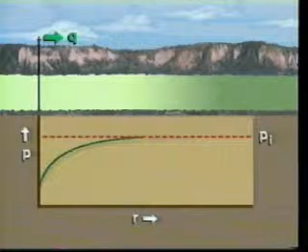Typically, the reservoir data that can be obtained from a pressure transient analysis include reservoir pressure, permeability, skin factor, the damage ratio, the PI or productivity index, radius of investigation and time to stabilization, degree of reservoir depletion, and the presence of faults, barriers, fluid contacts, or pinch-outs.

In this module on oil well testing, we shall begin with a review of the theory upon which pressure transient analysis is based. We shall then apply this approach to data from 3 reservoir systems: first, a reservoir which acts as a homogeneous system; next, a hydraulically fractured well; and finally, a dual porosity system.

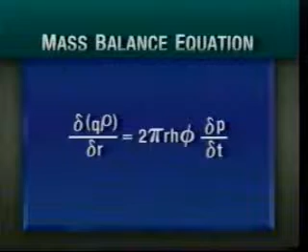Let's begin. The basic model for describing reservoir pressure response to flow is developed by combining 3 fundamental equations: a mass balance or continuity equation, which states that the rate of accumulation of mass in an incremental element is equal to the rate of mass flux into the element minus the rate of mass flux out of the element; a transport equation, in this case Darcy's law, which describes the relationship between volumetric flow rate and the pressure gradient; and an equation of state, which relates fluid density to pressure and temperature.

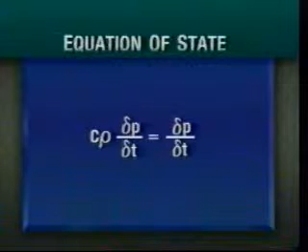By combining these equations and making some assumptions regarding the system, we can derive the radial diffusivity equation, a partial differential equation relating the rate of change of pressure with radial distance and time. Solving this equation for certain conditions allows us to develop a method for calculating reservoir parameters from measurement of the response to pressure disturbances in the reservoir.

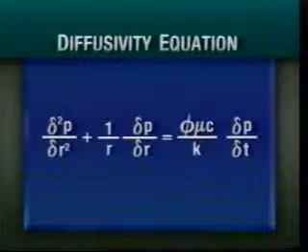In the other programs of the 400 series, we have spoken at greater length about the use of these flow equations in both conventional and modern methods of well test analysis and interpretation of pressure time data. Here we'll just review briefly. If you are unfamiliar with the basic concepts and techniques of each method, be sure to view the other programs before continuing.

Let us begin by making the first of many assumptions concerning our reservoir model. First, the reservoir is horizontal and of constant thickness, and is of infinite radial extent. It is bounded on top and bottom by impermeable boundaries, and is homogeneous and isotropic. Next, the producing wellbore is completely open to flow over the entire reservoir thickness. Next, only a single phase flows in the reservoir. And finally, the reservoir fluid is slightly compressible and at a constant temperature.

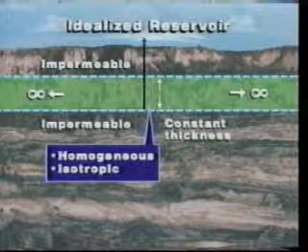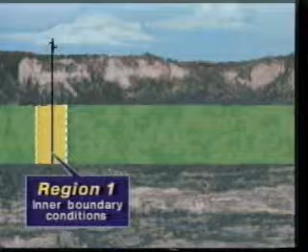Our model must also describe all the conditions existing in the reservoir: the inner boundary conditions at or near the wellbore itself, the conditions away from the wellbore, essentially the reservoir itself, and finally the conditions at the outer reservoir boundaries.

When a well is produced after a period of being shut in, a simple Cartesian plot of pressure versus time reveals a succession of 3 flow periods: a wellbore influence flow period, also known as the transient flow period. During this flow period, the reservoir acts as though it were infinite in extent.

A transitional flow period. Normally, no analysis is made of this period, owing to the complex interactions between the changing reservoir pressure and the reservoir geometry. And finally, a steady state or pseudo-steady state flow period. Due to the difficulty of maintaining a constant flow rate during a drawdown test, emphasis has been given to the development of methods to analyze buildup data.

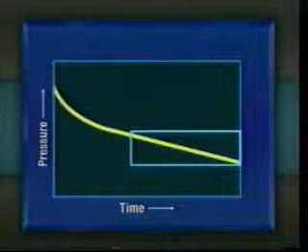The Horner method of pressure buildup analysis is based on the assumption of a constant rate of production prior to the test, beginning from a uniform initial pressure in an infinite reservoir. The graphical form of Horner's method will yield a straight line on a semi-log plot of pressure versus time.

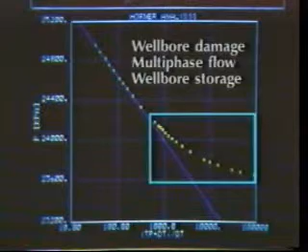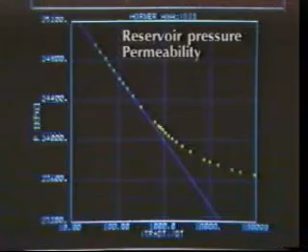In actuality, Horner plots usually show deviations from the expected straight line during the early time portions of the build-up plot, largely due to the effects of wellbore damage, multi-phase flow, and wellbore storage effects. These early time effects are usually overcome in later time. Thus, the straight line can ultimately be extrapolated to determine the average reservoir pressure. Additionally, from the Horner analysis results, we are able to calculate the permeability, flow capacity, and skin factor.

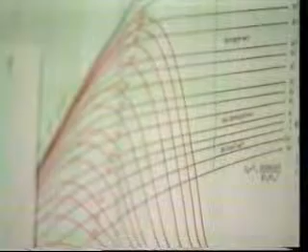The chief limitation to the Horner method is that it is only valid after wellbore storage effects have ended and before the boundary effects have begun. If wellbore storage occurs over the entire duration of the test, or if boundary effects begin immediately after the wellbore storage effects, it will be impossible to obtain the necessary straight line on the semi-log plot, and thus the Horner method will be inapplicable. With the modern methods, the presence of wellbore storage or boundary effects does not pose the same problem to the analyst.

As we've said elsewhere in the 400 series, the modern methods of well testing make use of all the data acquired during the course of a well test, including the data from early time. Modern methods graphically characterize the data by plotting it in the form of delta P, the change in pressure at the sand face, versus delta T, the elapsed test time, in log-log form. Additionally, the pressure derivative, with respect to time, is also computed and plotted on the same log-log plot.

More about this momentarily. Right now, let's look at the significance of the various sections of the curve depicted on the log-log plot. This will prepare the analyst to undertake a qualitative analysis of the test data and to indicate the point in time when a particular flow regime has ended and another begun. For example, here's the beginning of the wellbore storage influence period, as evidenced by a line of unit slope, which can be drawn through the early time data. Following the wellbore storage influence period is the infinite acting period, evidenced on the log-log plot by the straight line portion of the data curve.

The boundary influence period is evidenced by a deviation from the infinite acting period. However, the boundary influence period may be undetectable on the data plot. It may only be evident on the derivative plot. The derivative plot is determined with respect to the superposition time function. Basically, the plot is made by calculating the speed at which pressures are changing during the transient. Generally, the derivative plot is calculated on a computer.

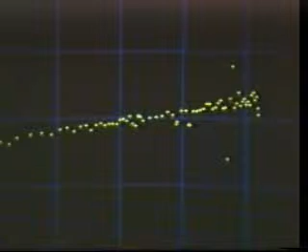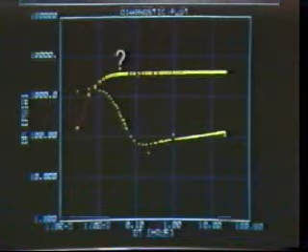There are several methods and choices available for computing and smoothing the derivative values, and it should be noted that any measurement errors made when conducting the test can contribute to creating a noisy derivative. The derivative plot is especially useful when trying to determine the end of the wellbore influence period. Note the characteristic hump in the derivative values, followed by a flattening. The end of wellbore storage is sometimes evident on the data plot as well, but it can be more readily and accurately seen on the derivative plot.

The horizontal portion of the plot, where there is no change in the derivative, is indicative of the infinite acting radial flow period, and hence that section of the pressure transient which would produce a straight line if plotted on semi-log paper. The boundary influence period can be recognized by a late time deviation of the derivative value. As before, the presence of a boundary may not be evident in the data plot at all. In this specific example, the data plot remains virtually unchanged while the derivative plot bends upward.

Ultimately, the specific shape of this section of the derivative curve can be used to determine the type of boundary that is influencing pressure behavior. For example, no-flow barriers or constant pressure boundaries. The derivative plot is also helpful for determining the cause of an anomalous pressure response, although this particular topic is beyond the scope of this video. There are, however, SPE monographs and other technical publications that provide much useful information on the analysis of anomalous pressure situations.

Let's summarize the material covered so far. In the first unit, we mentioned the basis for well test analysis and interpretation. We spoke of three necessary equations: a continuity equation, a transport equation, and an equation of state to derive the diffusivity equation, the basis of pressure transient analysis. We spoke also about the two methods, the conventional and the modern, and the way that each approach treats the pressure and time data. Lastly, we spoke of the derivative curve and its usefulness in providing interpretive information beyond what is available from a typical log-log plot of the data.

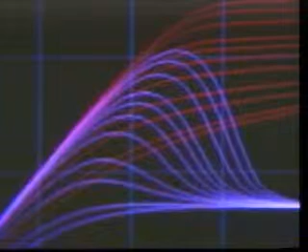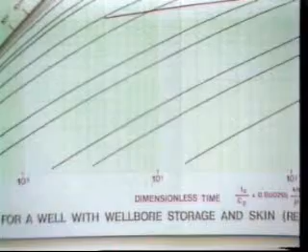A type curve is generally a log-log plot of pressure versus time expressed dimensionlessly, prepared in such a way that the curves are universally applicable for all types of specific reservoir environments. One set of curves is for wells with wellbore storage and skin in a reservoir with homogeneous behavior, another set of curves for a vertically fractured well in the center of a closed system with no wellbore storage, with fractures of infinite conductivity, and so on.

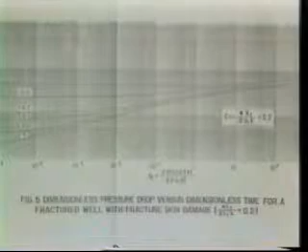The procedure for utilizing the type curves is quite straightforward, especially if we make use of the software currently available for pressure transient analysis. Place the log-log plot, including both the data curve and the derivative curve, on top of the type curve, and move the log-log plot over the type curve until a match is obtained.

We thereby obtain values for P sub D and T sub D, as well as a value for C sub D e to the 2s. These values will then be used to calculate values for permeability and skin for the reservoir.

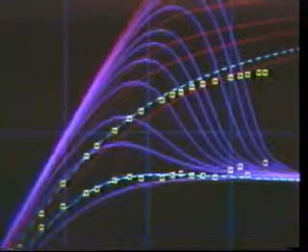When the proper match is obtained, the pressure and derivative data will lie on the corresponding curves at the same time. If the best match lies somewhere between the type curves, not to worry. The computer will generate a unique type curve for both data and derivative curves.

Ultimately, the values obtained from a type curve analysis should show close correspondence with the values obtained from the conventional Horner analysis. With this information on both the Horner and the type curve methods of pressure transient analysis in hand, let's now look at a build-up test, specifically the final shut-in period of a drill stem test conducted on a well in the North Sea.

This test was run in order to determine current reservoir pressure and to calculate reservoir parameters previously estimated from well logs. The following information was available prior to the test.

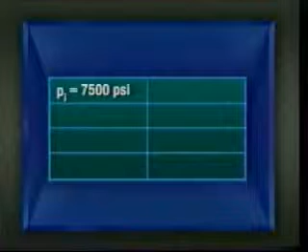The estimated initial pressure obtained from the initial shut-in period is 7,500 psi. The formation thickness is 18 feet. Fluid compressibility is 15.4 times 10 to the minus 6. The formation volume factor is 1.22. Viscosity is 0.53 centipoise. Porosity 15%. Wellbore radius 0.4 feet. The well was produced at a rate of 674 barrels per day.

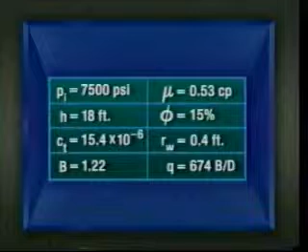We first construct a simple Cartesian plot to check for the presence of any anomalous tool response. The tool seems to have worked properly. We next construct the log-log data plot. We note the presence of wellbore storage as indicated by the unit slope of the early time data.

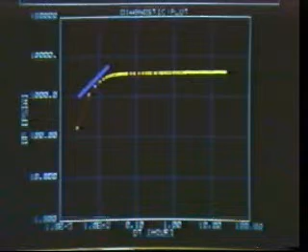Next, we display the values of the derivative. The derivative curve displays the hump characteristic of wellbore storage. Following the wellbore storage influence period, the derivative values appear to stabilize at an elapsed time of 0.1 through 0.35 hours, indicating the infinite acting radial flow period.

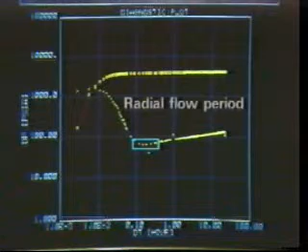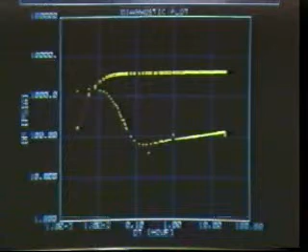The short duration of the radial flow period, followed by a steady increase in the derivative values throughout the rest of the test, suggests either severe wellbore damage or the presence of a near wellbore boundary.

Let's now begin the actual match of the pressure and derivative data using the appropriate type curve. As previously, we move the log-log plot over the curves until a suitable match is obtained for both the pressure and derivative data. From this visual match, for a delta T value of 1 and a delta P value of 100, the corresponding values of P sub D and T sub D are 0.94 and 220, respectively.

Also from the match, we obtain a value for C sub D e to the 2s of 1.4 times 10 to the 23rd. Now, using our value for P sub D, we calculate a value for the permeability, 32 millidarcies. Using a value of 200 for C sub D, we obtain a value of plus 24 for the skin factor. This is very high.

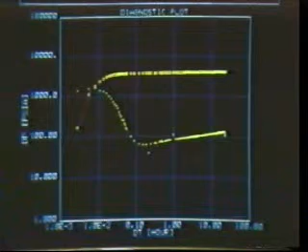Let's now turn to the Horner analysis and compare the results obtained from this method with those obtained from type curve analysis methods. From our derivative plot, we see that infinite acting radial flow occurred following an elapsed time of 0.1 hours, which corresponds to a Horner time of 134 hours.

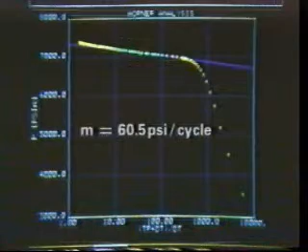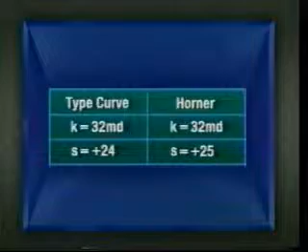Therefore, the correct slope on the Horner plot begins after this time and yields a slope of 60.5 psi per cycle. Using Horner techniques, we obtain a permeability of 32 millidarcies and a skin factor of plus 25, values which correspond closely to those from the type curve analysis.

From this information, it appears that the steady increase in the value of the derivative discussed earlier could be due to significant near wellbore damage. The magnitude of the damage certainly appears to justify some form of remedial work, perhaps a matrix acid job, but first the engineer should determine the possible cause of this damage.

That completes our qualitative and quantitative analysis of a fairly simple reservoir environment. There are some details which have not been presented. Fortunately, much of it is covered in the PE 403 manual or elsewhere in the 400 series on well testing. Specific details on pressure transient analysis are presented, as we said earlier, in the SPE monographs and other technical publications.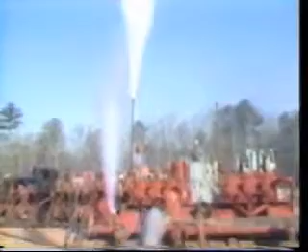Let's now take a look at a more complicated situation, a build-up test in a hydraulically fractured well. Hydraulic fracturing has become an increasingly common practice for improving the productivity of low permeability reservoirs and mature reservoirs. The purpose for testing fractured wells is to determine both fracture and reservoir properties in order to evaluate the success of the fracture treatment and to predict the long-term deliverability of the reservoir.

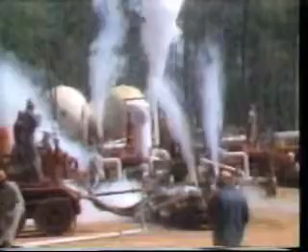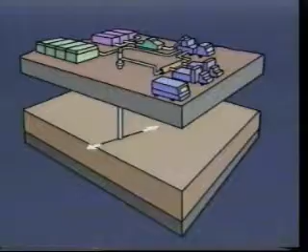A well is hydraulically fractured by pumping a fluid and proppant under high pressure into the formation until the rock cracks. The formation rock closes on top of the proppant, leaving a new pathway through which well fluids will flow, thereby improving the productivity of the well.

Fractures are not easy to model analytically, since the conventional analysis of pressure transient data is based upon theory and procedures that assume, among other things, that the formation is homogeneous with constant permeability and porosity, and that fluid flow in the vicinity of the wellbore is radial.

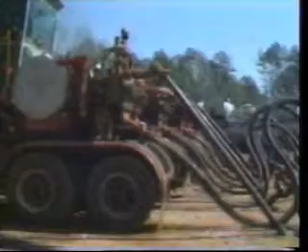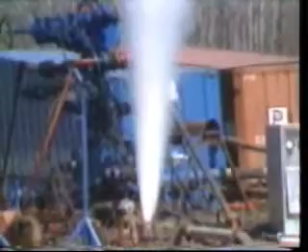Obviously, any reservoir heterogeneities, and this includes fractures, will cause the pressure behavior of the well to deviate from the behavior predicted by conventional pressure transient analysis methods. And so we need to find out just how the pressure behaves in a hydraulically fractured well in order to avoid seriously misinterpreting the pressure transient data.

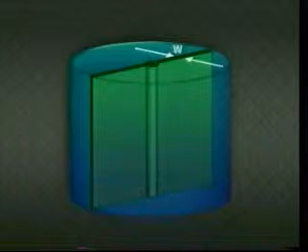We need to make some assumptions about the fracture itself. We assume it is a vertical fracture, the same height as the reservoir, extending outward from the wellbore. Other types of fractures are possible, however. Let W be the fracture width, H the fracture height, and X sub F the fracture half-length.

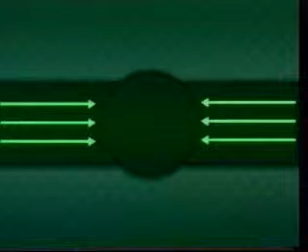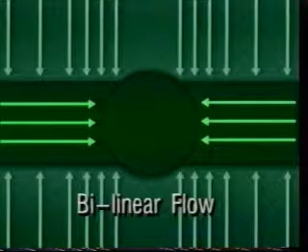After a well has been fractured, a new set of flow regimes arises, different from the flow regimes prior to fracturing. These new regimes are fracture linear flow, where flow into the wellbore is contributed exclusively by the fracture, not the formation; bilinear flow, in which fluids entering the wellbore come from both the fracture and the formation; formation linear flow, in which the formation flows linearly into the fracture; and finally, pseudo-radial flow, in which the presence of a fracture is undetectable in the data.

Fracture linear flow normally occurs during the same early time as wellbore storage effects, and thus is often invisible in the data. The presence of bilinear flow is evidenced in the data by a straight line of 1/4 slope on the log-log plot. Formation linear flow is recognized by a line of 1/2 slope on the log-log plot.

The start of pseudo-radial flow may occur at a time that is economically impossible to reach in the course of the test, and it is very dependent upon fracture penetration. For shorter fractures, pseudo-radial flow may develop earlier in the test. However, as fracture length approaches the drainage radius of the well, pseudo-radial flow will develop later, if at all.

In this case, an analysis of data according to conventional methods may be impossible, since the equation will contain two unknown variables, permeability and fracture length. In such cases, it is imperative that a pre-frac evaluation be run in order to estimate a value for the permeability. The success or failure of the fracture treatment can be determined using the calculated skin factor.

As a rule of thumb, the frac treatment is successful if the skin is reduced to less than -3. If wellbore storage effects last for a significant period of time, it is possible that the first three flow regimes will be obscured by its effects. If this occurs, there is no remedy. Analysis by conventional methods to determine fracture length is impossible.

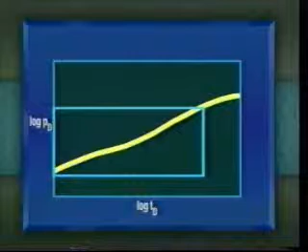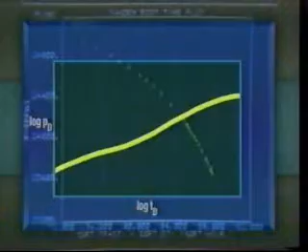If the wellbore storage effects are not significant, a bilinear flow analysis or a linear flow analysis may be undertaken to determine fracture length, if the data support these regimes. For example, from measurement of the slope of the line on the tandem square root plot, fracture half-length X sub F can be determined, provided that we have on hand an estimate of the permeability value. Once pseudo-radial flow has been achieved, conventional methods can be used to determine KH.

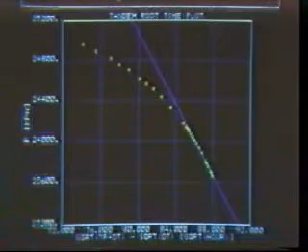The conventional method often cannot be used to determine the permeability, skin factor, and fracture length for a reservoir. Let's now look at an actual example of a buildup test conducted on a hydraulically fractured well and see how the combination of conventional and modern methods can be used together to analyze the reservoir system.

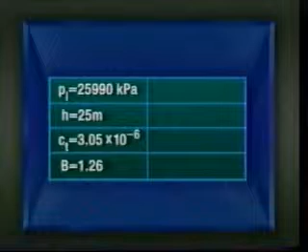The test data is given in SI units. We are given the following data on our hydraulically fractured well: an initial reservoir pressure of 25,990 kilopascals, a formation thickness H of 25 meters, a total compressibility of 3.05 times 10 to the minus 6 per kilopascal, a formation volume factor of 1.26, a fluid viscosity of 0.65 centipoise, a porosity of 12%, and a wellbore radius of 0.086 meters.

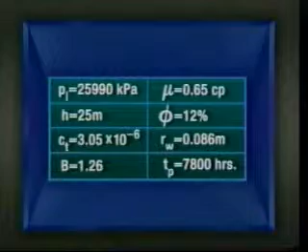The test duration was 240 hours, preceded by a producing time of 7,800 hours. We are asked to obtain values for the reservoir flow capacity, the permeability, the fracture half-length, the skin factor, and the flow efficiency.

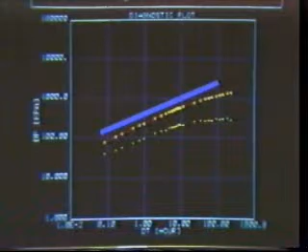We note the presence of half slope, indicating formation linear flow, which should be followed by pseudo-radial flow. The derivative plot supports this conclusion as evidenced by a flattening occurring at the same time.

For our Horner analysis, we utilize the specific data points from the log-log plot, which indicate the presence of pseudo-radial flow. Here we define them by using the cursor to create a box, and then instruct the computer to generate the Horner straight line. We see the solutions obtained using the Horner analysis methods: an effective permeability of 7.16 millidarcies,

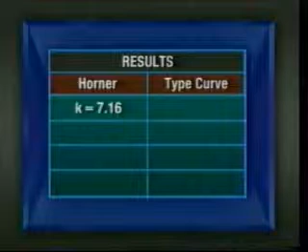a skin factor of -5.5, and a flow efficiency of 2.32. Note that we are unable to obtain a value of x sub f, the fracture half-length, using the Horner method.

To determine x sub f, we replot the data on the tandem square root plot. Pressure is plotted linearly on the vertical axis. The square root of T sub P plus delta T minus the square root of delta T is plotted on the horizontal. We then select a portion of the data from the linear flow period, and from its slope calculate a value of x sub f equal to 41 meters, completing our analysis of this hydraulically fractured well according to

conventional methods. The next part of the well analysis will be undertaken using type curve matching methods. We'll then compare these results with those obtained from the Horner approach.

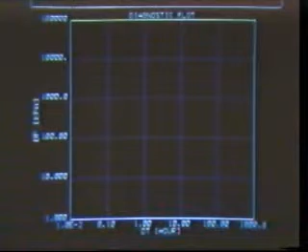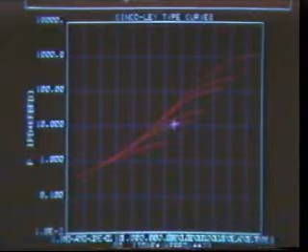Again, we see our data plotted in the form of log delta P versus log delta T. We select the appropriate type curve for our vertically fractured well, overlay our data plot upon it, and move it until we are satisfied that our match is correct.

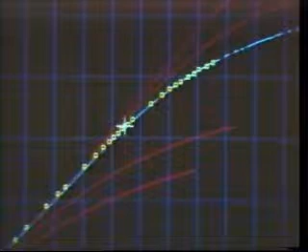Note as before that the values of delta P and delta T, which are read directly off the log-log plot in the curve matching process, are not presented here, only the data points. The computer does all the record keeping for us. Having made the match, we obtain the corresponding values for P sub D and T sub D.

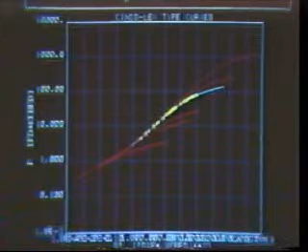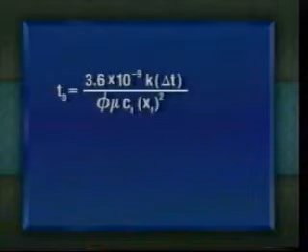To determine the fracture half-length X sub F, the time match points are utilized. From our curve match of delta T equal to 1.0, T sub D equals 0.068. Fracture half-length is calculated from this equation. Our final solution gives X sub F equal to 40 meters.

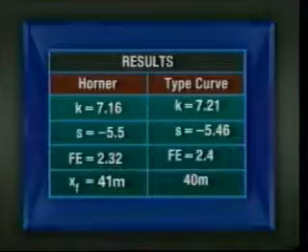From the preceding analysis, we can conclude that the frac job resulted in an improved skin factor and an improved productivity from this relatively low permeability reservoir.

The fracture lengths calculated from the test data compare favorably with the frac lengths calculated from fracture growth models. You can also view PE 305 for more information on the specifics of fracture stimulation.

Now let's take a look at another test of a non-homogeneous system. In this case, previous reservoir work suggests that this reservoir could be a dual porosity system. Generally, a dual porosity system is thought to consist of natural fractures and the rock matrix.

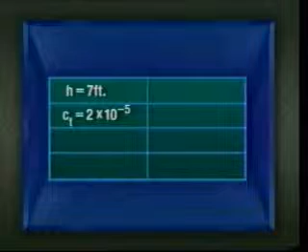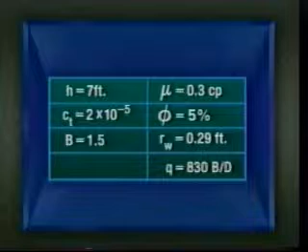The following reservoir data is available: a formation thickness of 7 feet, a compressibility of 2 times 10 to the minus 5 per psi, a formation volume factor of 1.5, a viscosity of 0.3 centipoise, a porosity of 5%, a wellbore radius of 0.29 feet, and a flow rate of 830 barrels per day.

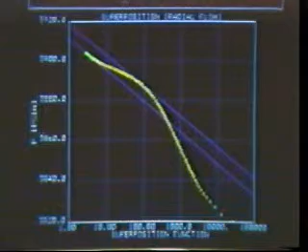Our subsequent analysis of the derivative plot will determine if the slope of the line on the semi-log plot here can be used to specify the presence of radial flow, from which we can calculate KH.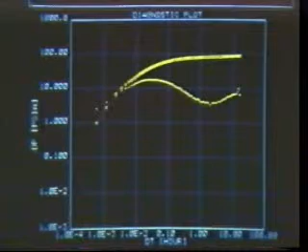Based on the strong indications of dual porosity, our next step is to generate the data and derivative curves and overlay them on a set of dual porosity type curves. We seek the best match.

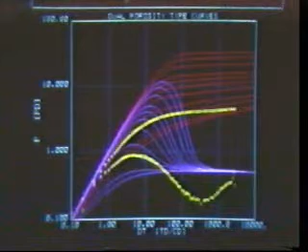Here, note that the data plot deviates from a greater to a lesser value of C sub D e to the 2s, again a strong indicator of dual porosity. The most defining characteristic of dual porosity is to be found on the derivative plot, the trough, here.

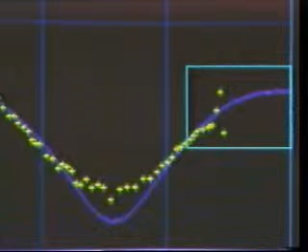After wellbore storage effects have ended, the curve indicates 3 flow periods. First, a period during which flow to the wellbore is contributed exclusively by the fissure system. Next, a period of transitional flow behavior. And last, a total system flow period, during which flow into the wellbore is contributed by both fissure and matrix systems.

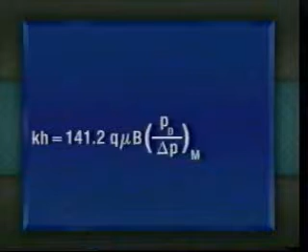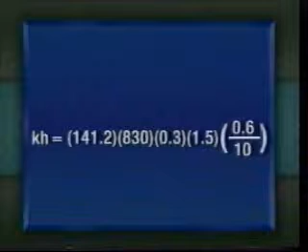Using values determined from our type curve match, we are able to determine a value for the total system KH. From the curve match for a delta P of 10, we obtain a P sub D match point of 0.6. Incorporating this value into our equation for KH, we obtain a value of 3,164 millidarcy feet, or for a formation thickness of 7 feet, a permeability of 452 millidarcies.

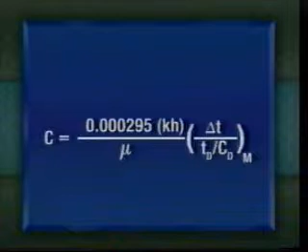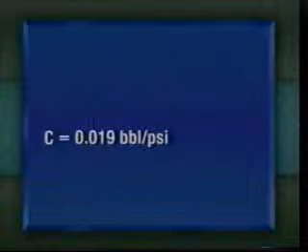To calculate a value for the skin factor, we must first solve for C, the wellbore storage coefficient. To do this, we use the time match points. For a delta T of 1.0, we obtain a T sub D over C sub D of 160. Substituting the remaining values, we obtain C equal to 0.019 barrels per PSI.

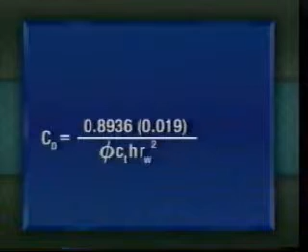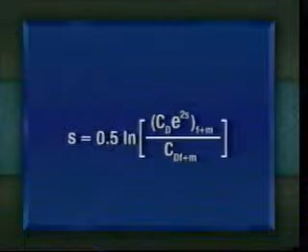With this value, we calculate the dimensionless wellbore storage constant for the total system, fissure and matrix, using this equation. With this value, we finally calculate a value of skin using this equation. We obtain a value of minus 4.1 for the skin factor.

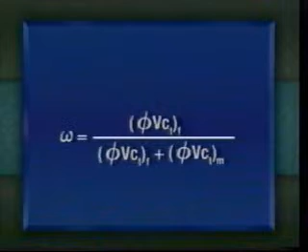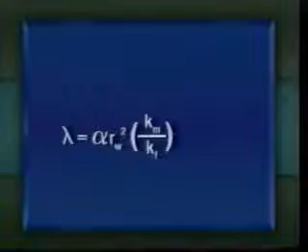To characterize the heterogeneity of this system, we make use of the developments of Warren and Root, which utilize two terms: omega, the ratio of the storativity of the fissure system to the storativity of the total system, and lambda, the interporosity flow coefficient, which determines how quickly the matrix blocks start to contribute to flow. For homogeneous systems, omega will equal 1.0 and lambda will equal 0.

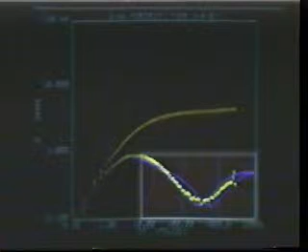Essentially, omega governs the depth of the trough on the derivative plot and defines how the transition is made between fissure flow and total system flow. These terms are not essential to the determination of KH or skin. However, if a suitable match was not obtained, reservoir modeling to obtain a better match could be undertaken using these terms as shown here. This may result in more accurate values for skin and permeability.

Let's begin to summarize. In this second unit, we began with a brief review of type curves and a practical example of a build-up test from a reservoir with few anomalies. We performed our analysis of the well data according to both conventional and modern methods. We then moved on to a discussion and analysis of pressure transient data from a hydraulically fractured well, and finally, an analysis of data from a dual porosity system.

As you saw in the case of the hydraulically fractured well and the dual porosity system, the procedures become a little more complicated. Both methods of analysis, the conventional and the modern, are usually applied to the same test data as a means of comparing and verifying results and to avoid errors of misinterpretation. Certainly the challenge ahead is to apply these methods to some of the more heterogeneous reservoir systems throughout the world.